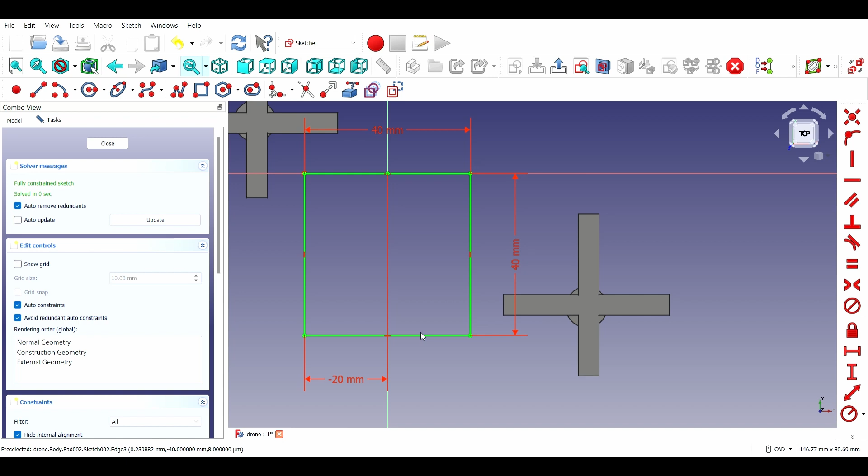To set the position of both these cuboids, I have used the toolbar below to set the positions in the attachment and position section. Next, I have made this smaller detailed design, present towards both sides of the drone.

To sketch it, I drew it with the polyline tool and then set it. Similar to the cuboids, I have also padded this side design and set the position using the toolbar.

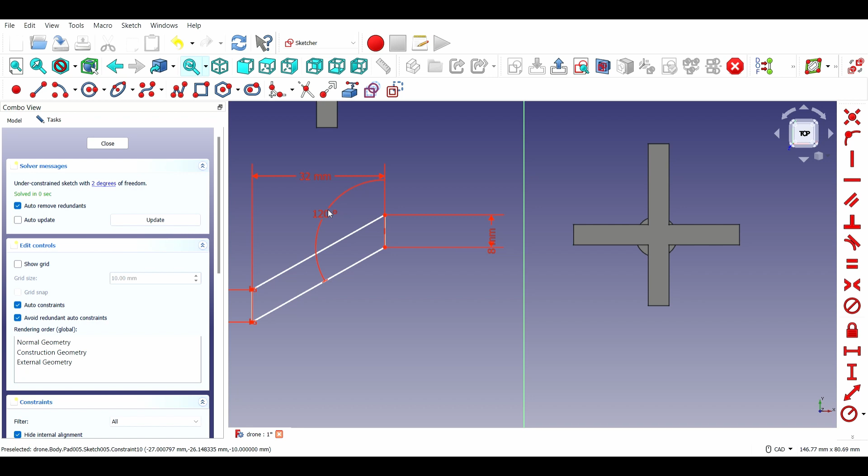Next, we move on to the arms, which I drew using the same polyline tool, setting the angles and line length, and padded them accordingly.

Then I used the length of the same sketch I made and copied it 4 times to make the 4 arms of the drone.

Next, I went to Part Design and chose cubes, setting the position here and here. I used the boolean operator to remove this from the main arm to create this design.

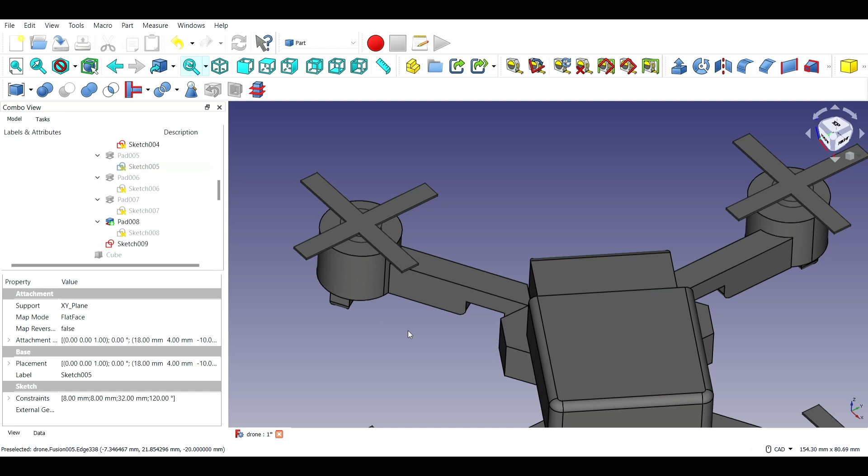After that, I also filleted these edges to make it look more realistic. A similar thing was done with the front two arms, where I used the chamfer option from the top toolbar to make this edge sharp.

I made 4 cylinders and padded them accordingly, setting them to the required position using this toolbar.

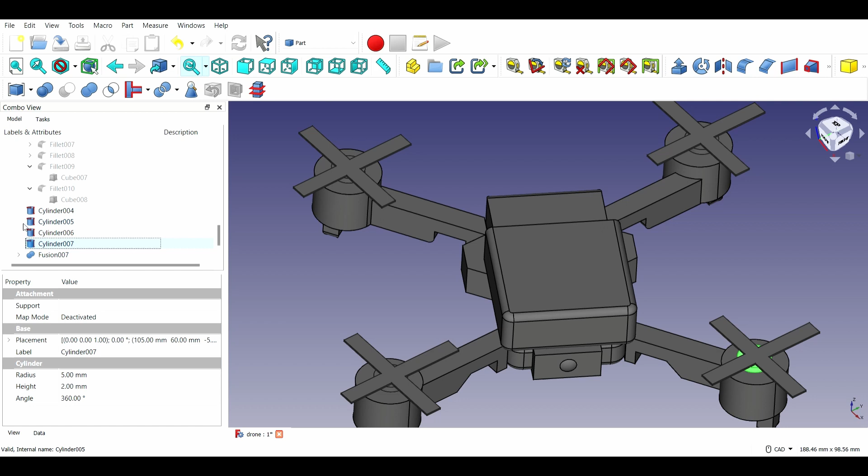I took 4 more cylinders and placed them on top of the bigger cylinder, then included 2 cubes on top of that to act as the propeller, and used the fusion operator to make them into one unit.

Next, I made this cube and inserted it here, and then added a sphere to make the camera lens.

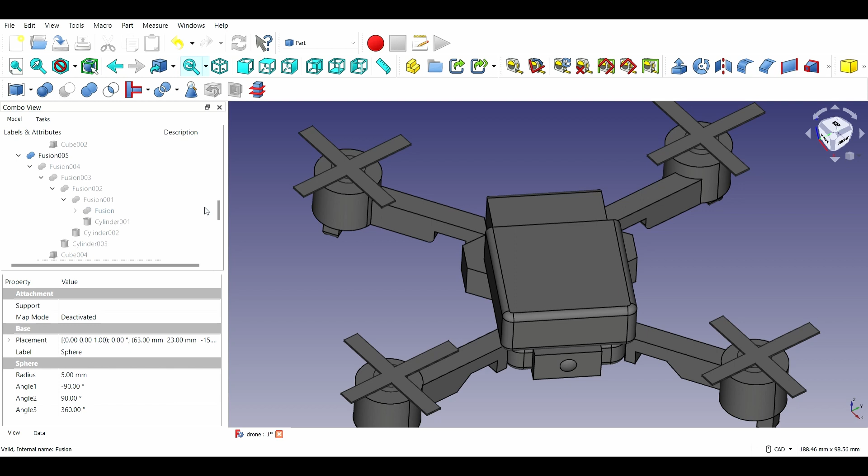To 3D print it, we can go to the Cura software. First, we select the entire body and export it to Cura by converting it into an STL file.

So here we are in the Cura software, where we can 3D print the drone we have built. By selecting the drone, this toolbar allows us to do various things like rotating the orientation.

I have chosen the line density to be around 0.1mm and the infill density to be 20%. The printing temperature is 200 degrees centigrade and the speed is 50 millimeters per second.

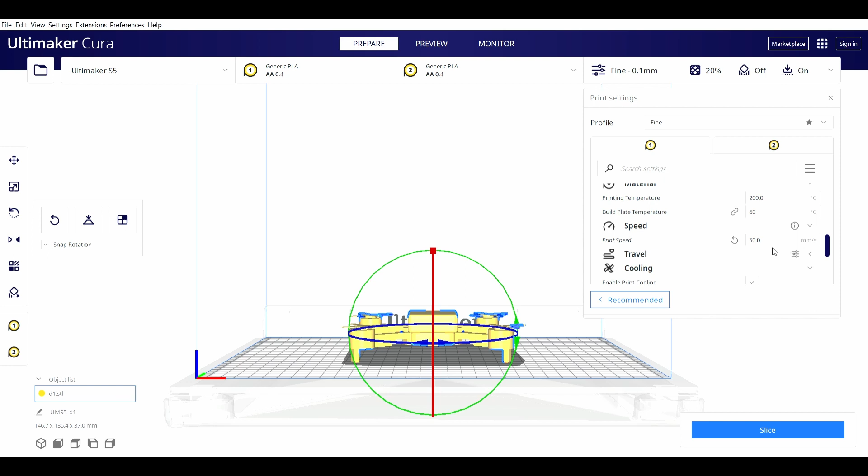Let's go on and slice the structure. We can see that it takes around 7 hours and 56 minutes, and 35 grams of material, to print this drone.

Let's preview the drone. We can see that first the legs start getting printed, then slowly the body, and finally we reach the top of the drone.